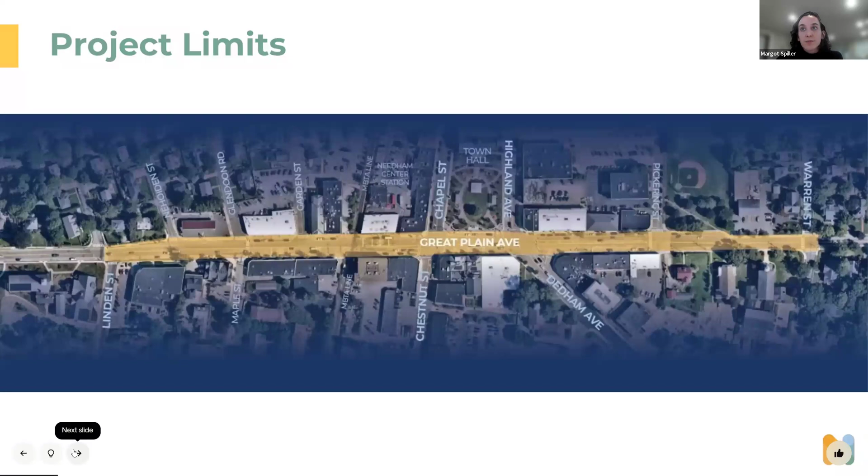While Karen's unmuting, this first poll is looking at what your connection to the center is - whether you're a resident, an employee, or business owner in Needham, or a resident in a nearby community who just wants to see what's going on in Needham Center. We'll give a minute or two for each of these polls to make sure folks have the opportunity to put their responses in.

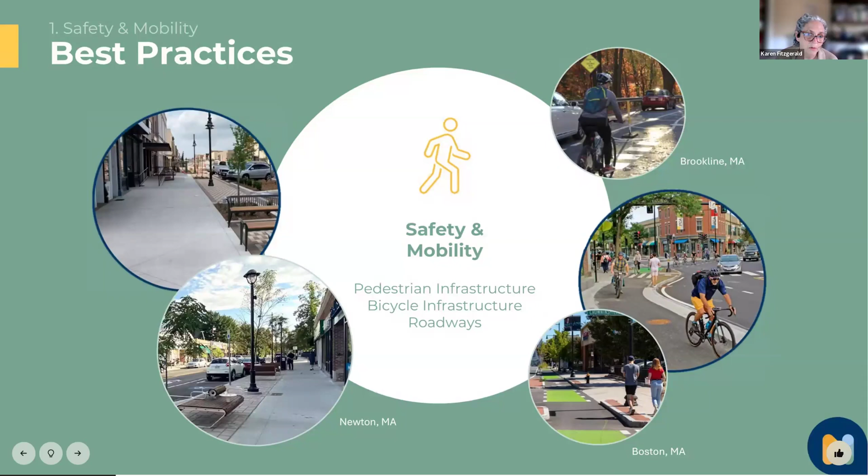Also, more diverse modes of transportation, such as bikeways and safe bicycle facilities, will be part of the design that we'll be looking at for this area.

Sustainability and resilience is an interesting and very important part of all of the design work that we do. This includes stormwater management through use of green infrastructure, but also use of green infrastructure for shade and heat island mitigation, and just beautification and habitat accommodation downtown.

Beautification and placemaking—let's talk a little bit about placemaking. Placemaking really brings together the economic development, the cultural and historic value of Needham, the people, and the place; that's really what it's all about.

It really capitalizes on the people who are using it, along with the character of Needham and the culture, while also increasing economic development downtown, bringing people downtown, creating spaces where people like to be and meet their friends and enjoy outdoor dining, or simply sit and read a book somewhere. That's sort of what we're talking about when we talk about placemaking.

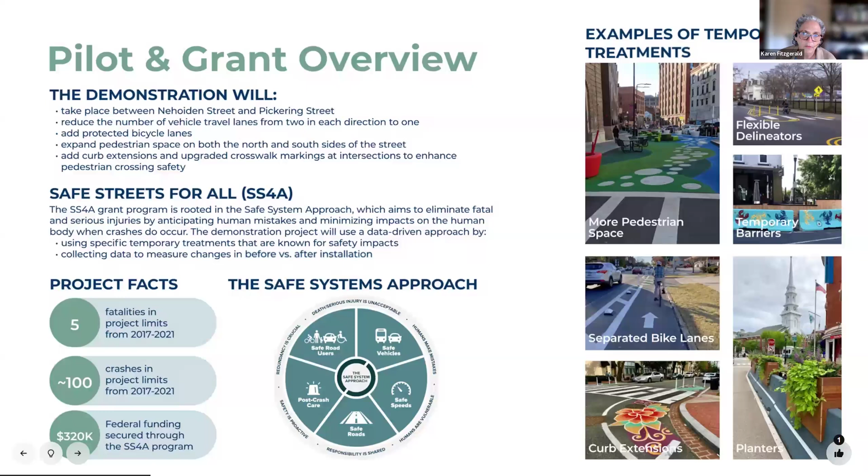Next slide, please—these are just some examples of other pilot projects. You can see here planters creating more space on the sidewalks for outdoor dining or seating.

Right. Great. Thanks, Karen. Sure.

So I'm just going to go through some insights we've gotten from engagement to date. As I mentioned, we've had several opportunities to connect with different members of the Needham community over the past few months, and really appreciate you all taking time out of your busy schedules to talk to the project team about your thoughts and priorities for this project. We're all really excited and passionate about creating infrastructure improvements that are reflective of the community's values and goals, so your input is incredibly valuable to make sure we're heading in the right direction with the detailed design.

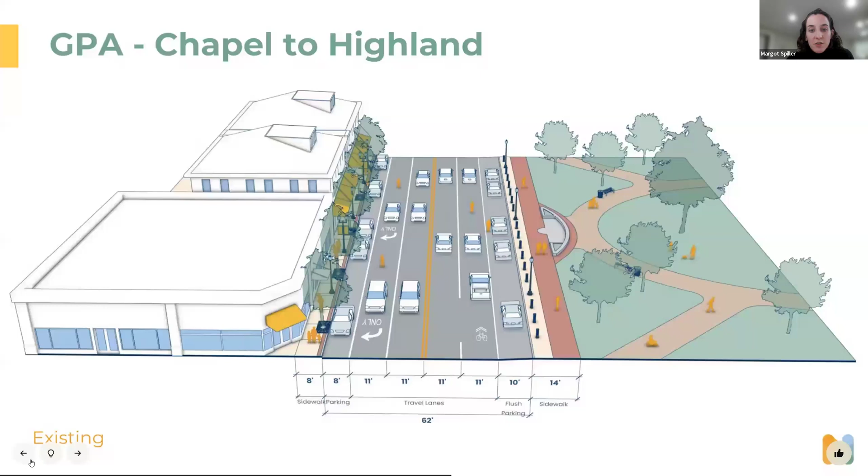So there are 2 alternatives that we're looking into. In the first one, you can see the amount of pavement is reduced by having 2 travel lanes as well as 1 lane of parking.

This allows us to have sidewalk-level bicycle lanes on either side of the street, as well as wider sidewalks, which are now 12 to 16 feet on either side, along with that consistent amenity zone on either side of the roadway. There's space for trees, lighting, and benches. We like that in this design there's physical separation between those biking and those walking, so there are fewer opportunities for conflicts between travel modes.

The second alternative is quite similar, but the location of the bicycle lane and that amenity zone is switched, so the street trees are closer to the roadway, giving the benefit of a more visual narrowing of the roadway corridor. The bicycle lane and sidewalk are still clearly delineated by a 2-foot buffer of textured material, so people can easily see the limits of each area.

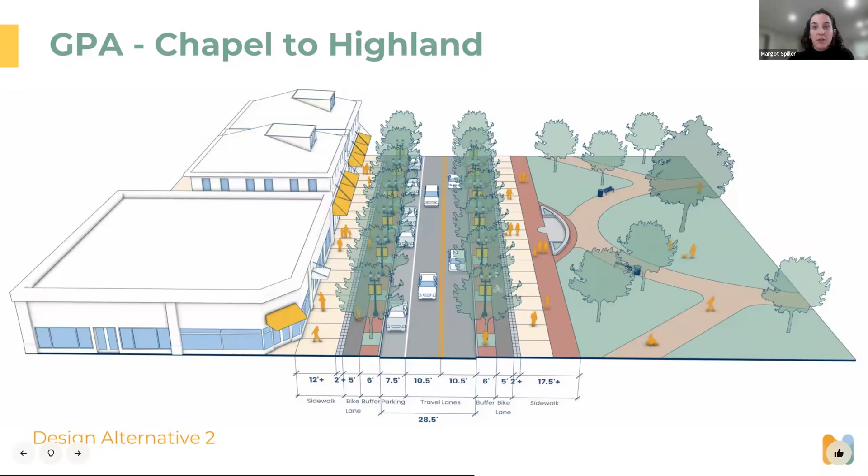All right, with that, we're going to turn to the traffic analysis. We have a couple more polls, and I'll turn it over to the traffic team.

First, how would you currently characterize your trips through Needham Center? Either the center being a destination at the end of your trip, or something you pass through to either a destination in town or somewhere else in the region.

A lot of trips to Needham Center, but a pretty good mix of all options. Just give it a few more seconds for people to chime in.

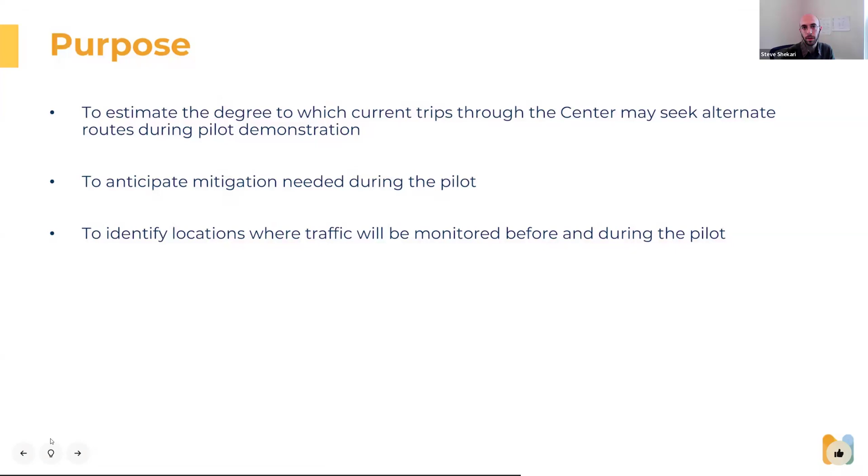So we performed a traffic diversion analysis to estimate the degree of traffic diversion, how much traffic will seek alternate routes from the center, and to anticipate locations that might need some sort of mitigation in terms of safety or operations during the pilot, and also identify locations that need to be monitored for further traffic data collection before and during the pilot. With the pilot in place, we can validate and test out our methodology and fine-tune it for the future long-term design.

On this slide, the graphics are fairly similar to what Margot presented in further detail, but by comparing the existing roadway configuration with 2 lanes in each direction against what a typical reimagined transformed roadway might look like, with 1 lane in each direction of travel and the rest of the space given to other uses: pedestrians, bikes, and streetscape.

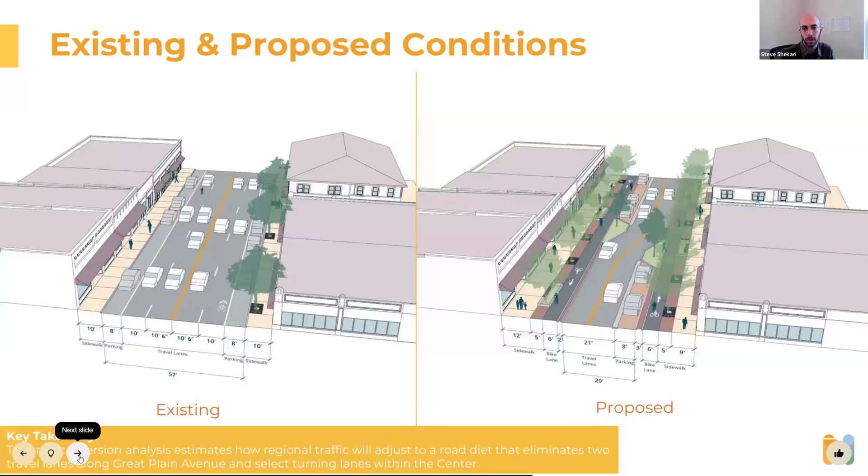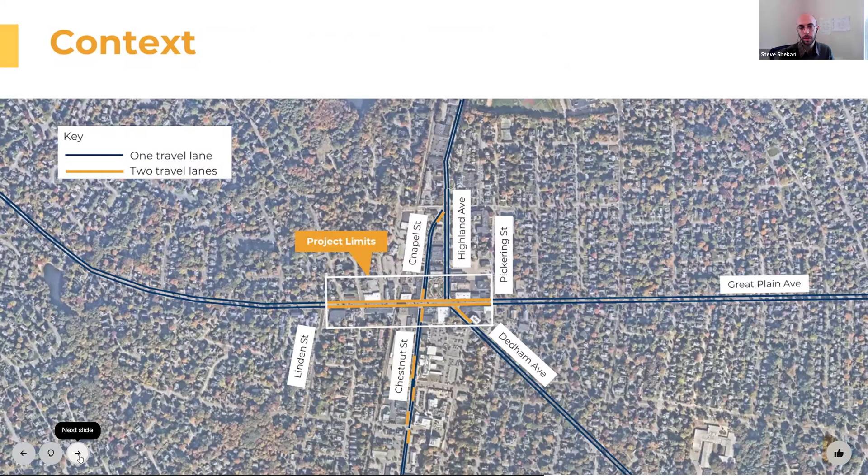Looking at the bigger picture, as you're all aware, Great Plain Avenue and other roadways that connect to the center area mostly have 1 lane in each direction outside the center. It's interesting that it's only close to the center that we have multiple lanes approaching each intersection. This is a typical block at Great Plain Avenue at Webster Street, the signalized intersection that currently operates with all the roadways approaching it having 1 lane in each direction.

For us to perform our analyses, we made some assumptions. On this slide, you can see the existing lane configuration on each of the intersection approaches at the center.

What we assumed was that all the approaches to these two intersections will be reduced to one lane, with the exception of Chestnut Street, for two reasons. In our initial evaluations, we thought Chestnut could remain at its current lane configuration with one through and right lane and one exclusive left turn lane, because there is a fire station right down the street, and we anticipated that this approach might be frequently used by emergency vehicles, and we wanted to minimize the impacts to this approach for emergency response times.

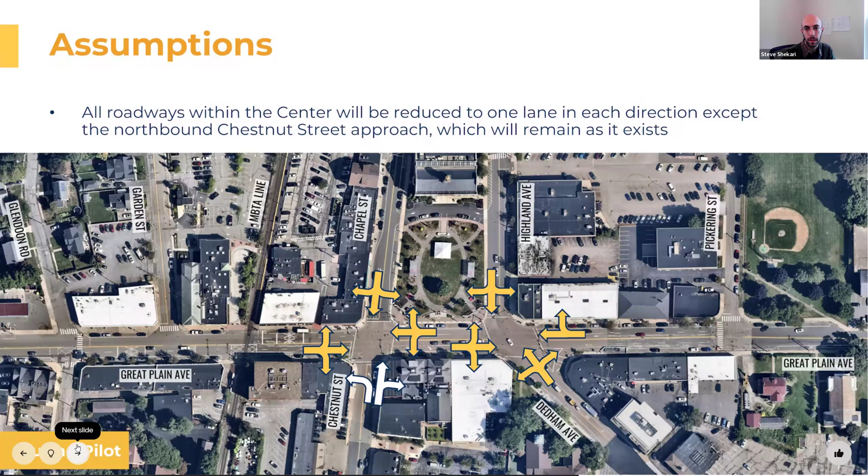Also, in the traffic count data that we collected, we realized that the left turn out of Chestnut Street going west onto Great Plain Avenue is one of the heaviest of all the left turning maneuvers. Reducing that, or combining that to one lane on that approach, could induce some additional diverted traffic, which may not have an easy alternate route to use.

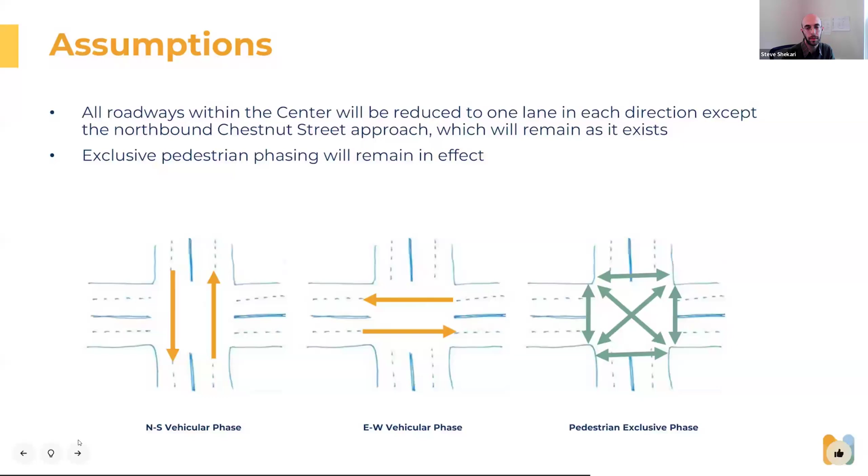The other assumption we made was that at these two signalized intersections, the timing of the pedestrian phases is exclusive to them, meaning that when a pedestrian pushes the button, all the motorists will stop and the pedestrian has time to cross the street. After that, the vehicles get a green light and they can use the intersection.

We also assume that any traffic that is over capacity at any of these intersections will seek an alternate route. By over capacity, I mean every intersection, depending on how much green light is given to any of the approaches, can handle a number of vehicles during each green phase. If there are more cars that need to use that approach during that green phase, they will be left over for the next time, and they will eventually find an alternate route that might be more convenient to get to their destination.

In our analysis, we also assume that the longer commuting trips will be diverted to regional highways, whereas the shorter, more local trips will find an alternate route within the town itself through other local streets.

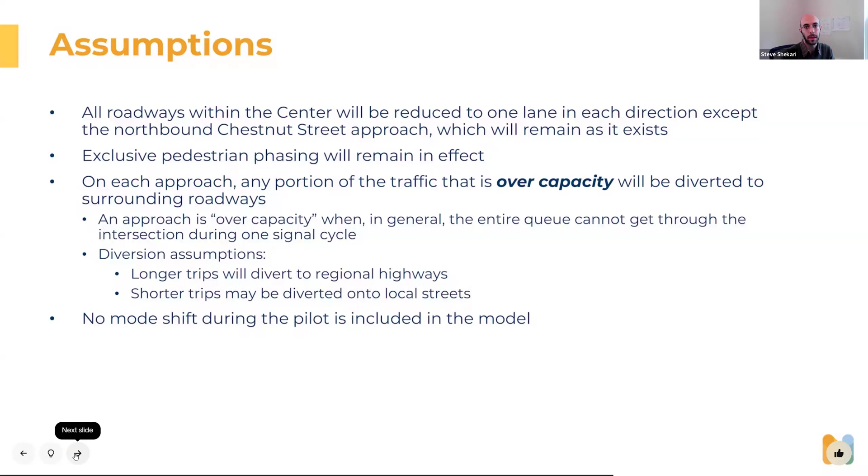We also know that when people find an easier way to get to their destination, they might change their mode of travel. They might use biking or walking, but for our evaluations to remain conservative, we assume that that change in behavior, or mode shift as we call it, does not happen. This results in a more conservative analysis.

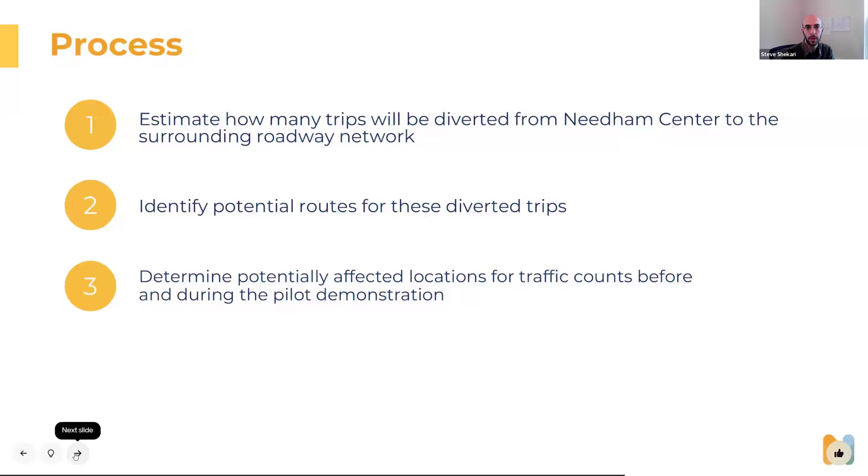We took a three-step process during our evaluations. We first estimated how many trips will be diverted from Needham Center to the surrounding roadway network. Then we identified the routes that these diverted trips might travel on. Then we determined what locations might be potentially impacted within the surrounding network for further monitoring and additional data collection during the pilot demonstration.

The typical commuting peak period falls in the morning between 7 to 9 a.m. and in the evening between 4 to 6 p.m. As we see with all these fluctuations, when we found our results, there is some traffic that will be diverted during these peak hours, but it's well expected that for most hours of the day, even with the reduced number of travel lanes, the intersections and the town center can handle the traffic without inducing any diverted traffic to other roadways.

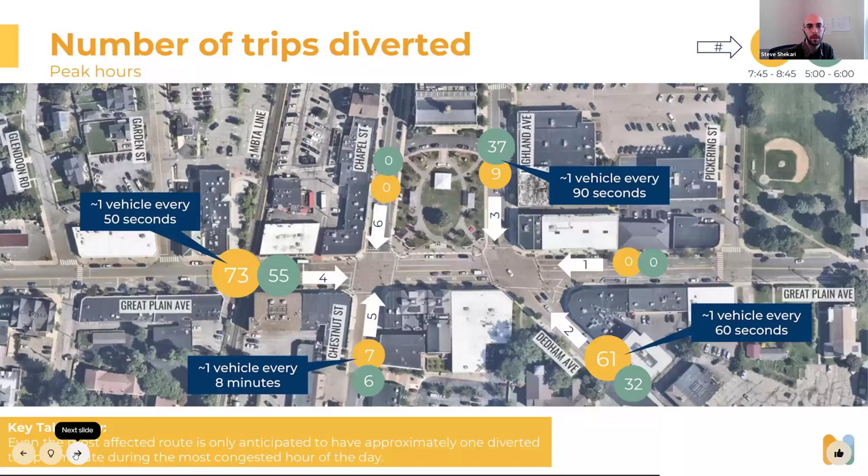What we'd expect, particularly in the short term when a demonstration project goes into the ground, is a certain number of people taking a different route to avoid Needham Center. People going into Needham Center on purpose will continue to do that, but a lot of trips go from somewhere east of Needham to somewhere west of Needham and don't really have any business in the center. So we'd expect those trips to be diverted around the center.

Other ways people adapt might be time shift—making their trip earlier or later. And over a longer time, we'd see things like a mode change. What we'd love to see for this project is more people walking, biking, and maybe taking transit into Needham Center so they don't need to bring their car and find a place to park. In any case, there are a lot of different ways people adapt, and a lot of complex behavior we're making assumptions about to understand the potential future.

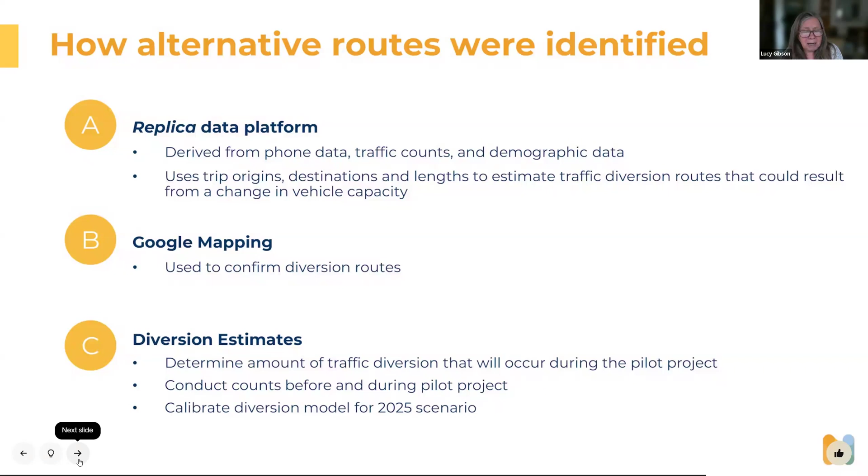This is some of the data we get from the Replica platform for trips going through Needham Center in the morning peak hour. Some of the data shows that in the morning peak hour, a big percent, more than half, are commuting trips, with fewer trips for other purposes like school.

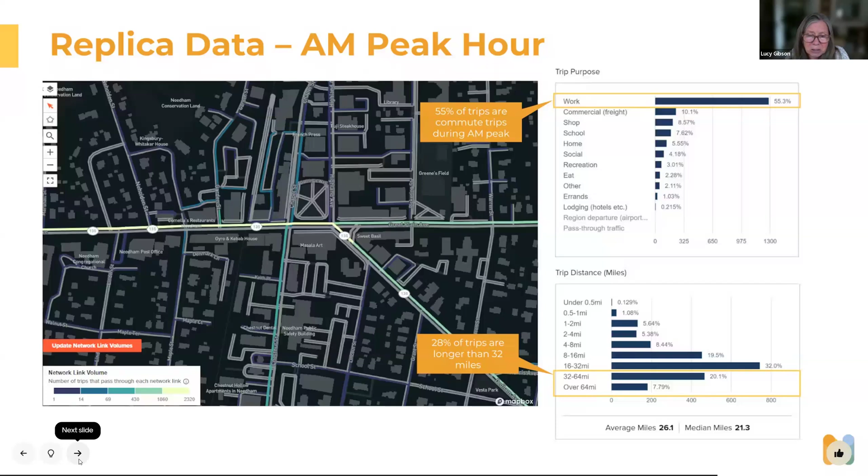We also see that a lot of these trips are quite long: 28% of the trips are longer than 32 miles, and another 32% are between 16 and 32 miles. This data frankly surprised us—to see how people are coming from a long way on either side of Needham but using Needham Center basically as a cut-through rather than taking other routes.

Once we have an understanding of the number of diverted trips that Steve mentioned, and then understanding where people are going—what are the routes—we want to determine other locations around Needham Center that might be affected, again to plan for traffic data collection.

The one different result is on Highland Avenue. Highland Avenue has a much smaller percent of long trips. It's much more of a local street serving travel in and around Needham. So on Highland Avenue, we would see some diversion onto local streets that currently use Highland.

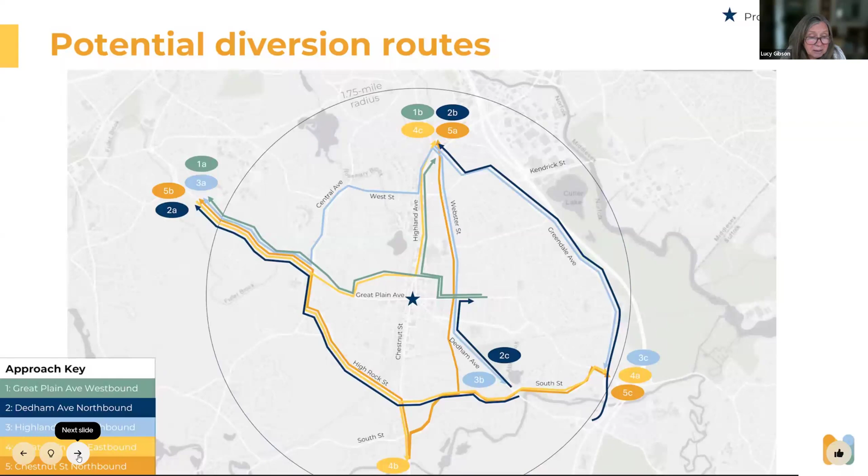So those are examples of how we mapped out the diversion routes and how they'd be affected. We also looked at which intersections would be affected if we saw more local diversion, which we don't expect a lot of, so we can gauge where to collect data and watch for potential issues with diverted traffic. These are all the different routes we expect.

We also want to pay a lot of attention to where schools are, because during the peak hour a lot of people are destined to schools to drop off kids. That's a scene of a lot of activity and walking, so we want to make sure we're avoiding impacts, particularly around schools.

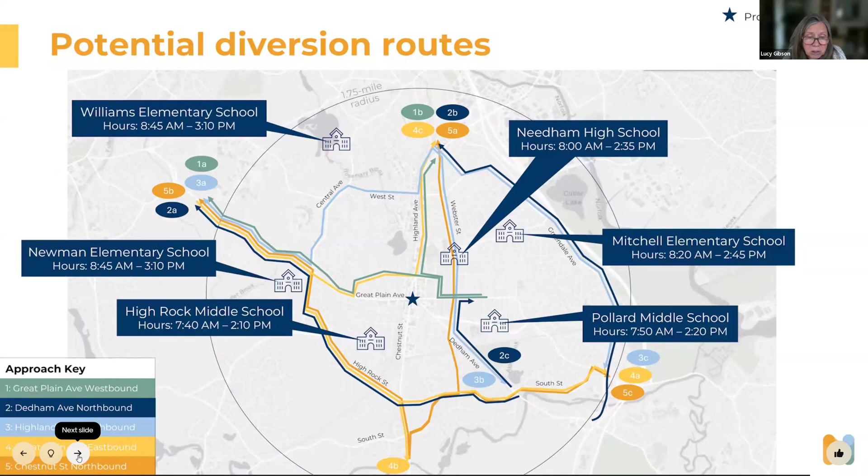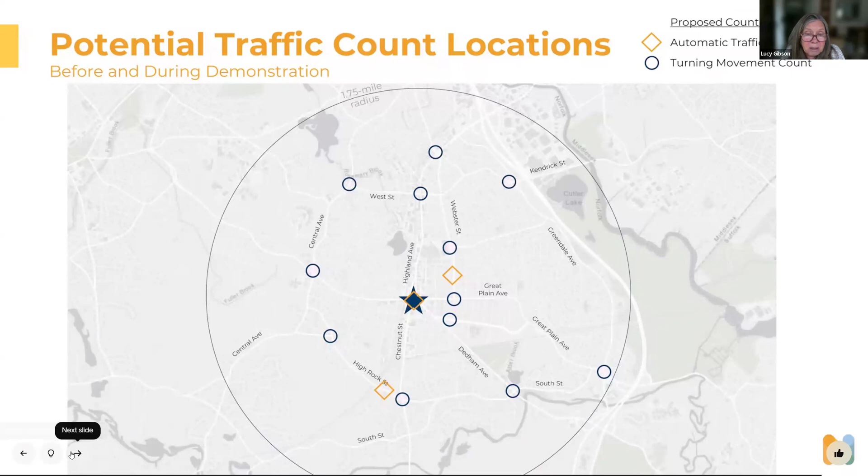Considering all this data, we proposed a number of count locations where we would count traffic both before the demonstration project goes in and during the demonstration project, so we can really compare conditions and how people are adapting to the change. That will help us understand and take the design further.

Right, great, thank you Lucy. Just to wrap us up, talking through next steps.

We will have an upcoming engagement event in the near future, in about a month, to talk through the conceptual design as well as the potential pilot design in more detail. But after that, the next big milestone of this project is installing the pilot demonstration. We're looking to have that installed sometime during the summer this year, likely after the 4th of July, given the big event in the center.

That gives us the opportunity to see the benefits of reallocated space within the public realm. It also allows us to install the pilot while traffic is lighter and we don't have school traffic. So if we install it in July or August, we can tweak it as needed based on how traffic is operating, and then be in a great spot for September when school traffic is back in session.

We really feel like the pilot demonstration is a great opportunity for the community to see firsthand the impacts of a changed layout, in terms of how repurposed space could be utilized, as well as how dedicated bicycle facilities and shorter pedestrian crossings will feel as a user in the space.